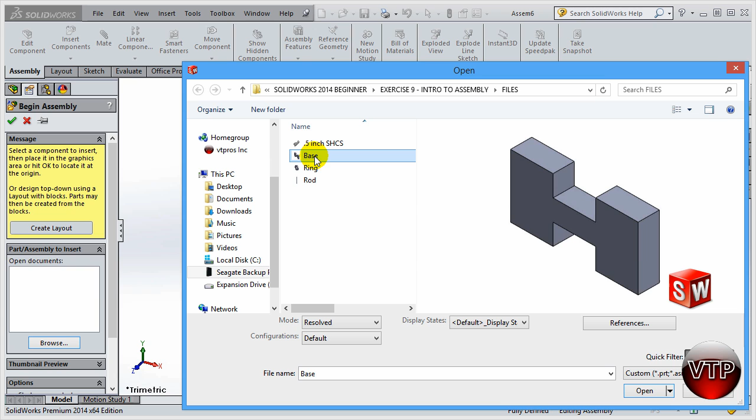First and foremost, come over here and click on base. If you click on them, you're going to get a preview on the right side, or you're always welcome to come over here and click on it.

If you're using Windows 8, you can click on this arrow and click on extra large, and then minimize the preview on the right side, or click on hide preview to make that go away, and then you have your 4 parts located here.

So that's another different way to tell which part you're opening. I've got a base section, then a rod, then a ring. Let's go ahead and play around with those in a little bit.

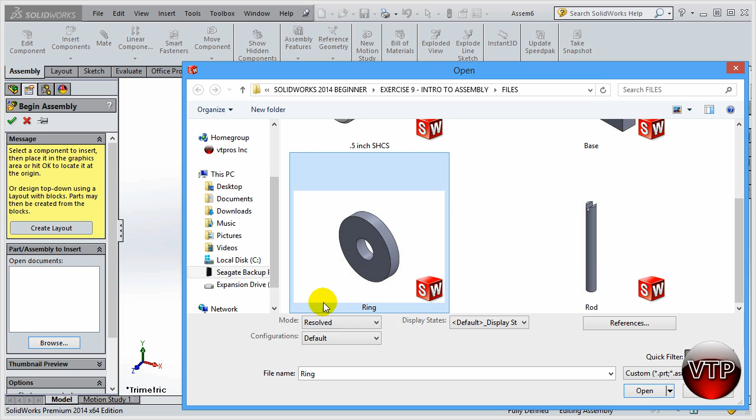I want to make sure that my first part, which is the base, is the fixed part. Click on open. Solidworks will put that on your mouse automatically.

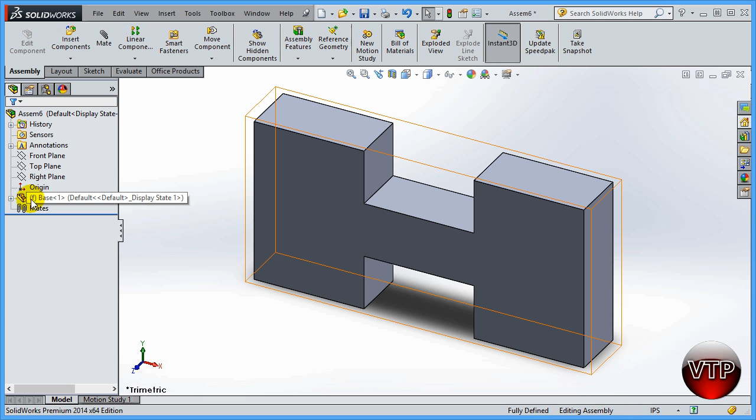Right now I don't have anything clicked, I'm just moving my mouse around, and you're gonna see that my part is there. As soon as I left click, it will place the part in the Solidworks assembly, calling it assembly 6, and making sure that this part is fixed. Now I can rotate this part, but that doesn't mean it changes anything.

So it remains as a fixed part. Let's go ahead and place the second part in here. To place it, come over here under Insert Component, Browse, and let's select the rod and click Open. I'm gonna zoom out and just place this rod over here.

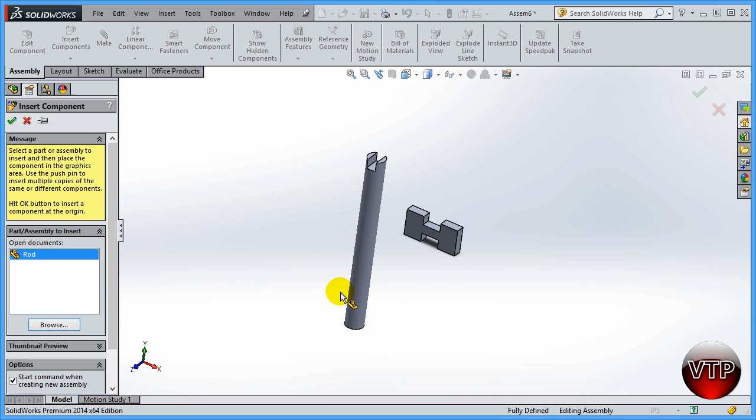In our next session, we will start assembling all these parts, but I wanna also insert the third part in here, which is called the ring. Click on that and click Open.

So there you go. First and foremost, you can move this part around, you can move this part around, but you can't move this part around. This is going to be your base. Everything that you mate to this base or to each other will be according to this base.

So the way I like to work, now I already know how this is going to look, but I'll mate the first part to here, and the rest will be according to each other. Now there's no order on what to mate with what, but it's always good to get started from your base, mate whatever you need to do to your base, and then mate other things to it. You can also mate assemblies to assemblies, and I'll show you how to do that a little later. But you're not limited to just parts that you have to mate together.

So for example, you mate this to this and save it, then come back and mate them to this — that's also doable, and I'll show you how to do that in a later session. But for now, you got your 3 parts set up and you're ready to mate those parts. So in our next session, we'll start by mating the rod to the base.